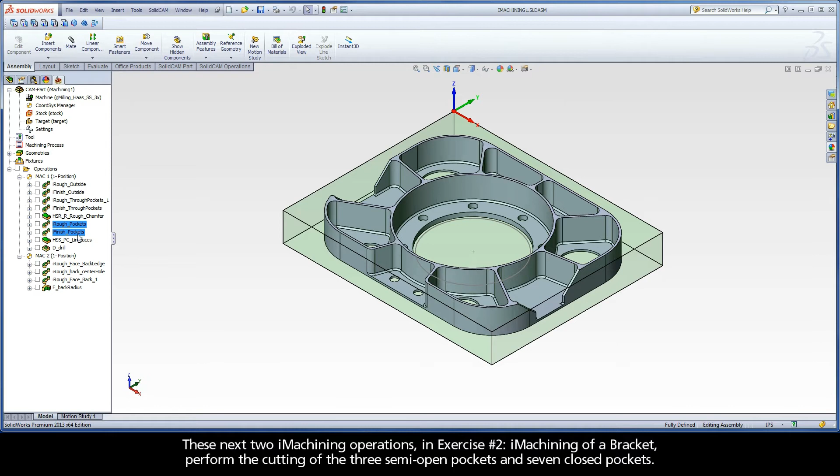These next two iMachining operations in Exercise 2, iMachining of a bracket, perform the cutting of the 3 semi-open pockets and 7 closed pockets. First, let's take a look at the iRough pockets operation. Double-click on the operation in the CAM tree to open the iMachining operation dialog.

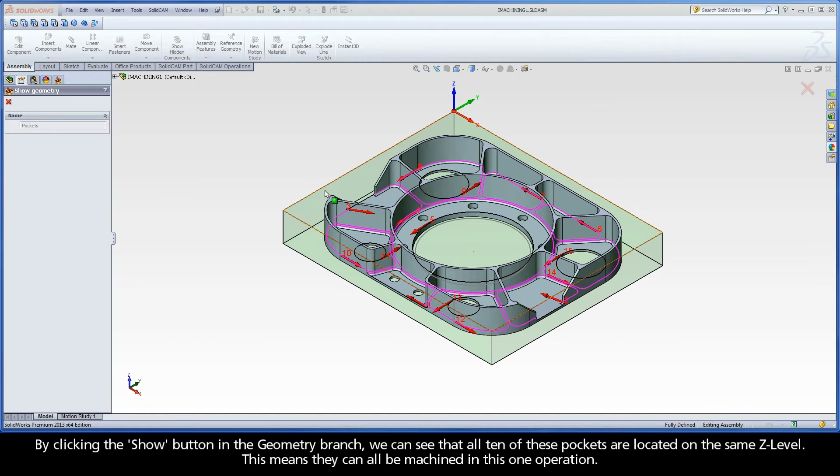By clicking the Show button in the Geometry branch, we can see that all 10 of these pockets are located on the same Z level. This means they can all be machined in this one operation. The first 3 chains have edges marked as open and wall, allowing the tool to enter from those edges. 5 of the closed chains use the through pockets as entry chains.

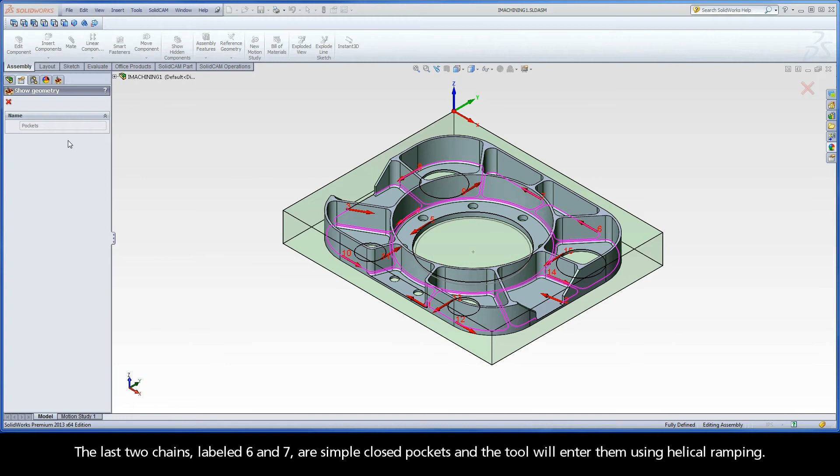The last 2 chains labeled 6 and 7 are simple closed pockets, and the tool will enter them using helical ramping. Exit the Show Geometry dialog by clicking Cancel. We will be using a 3/8 inch diameter bullnose mill with a corner radius of 1/16 inch, as shown on the tool page of the iMachining operation dialog.

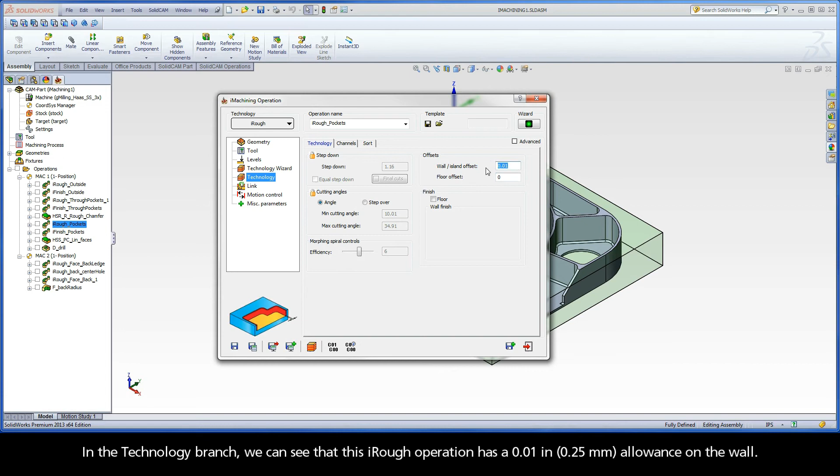The levels have been picked with no additional delta depth. We will use the default Technology Wizard settings with a machining level aggressiveness of 6. In the Technology branch, we can see that this iRough operation has a 10 thou allowance on the wall. Let's click Simulate and take a look at our toolpath at work.

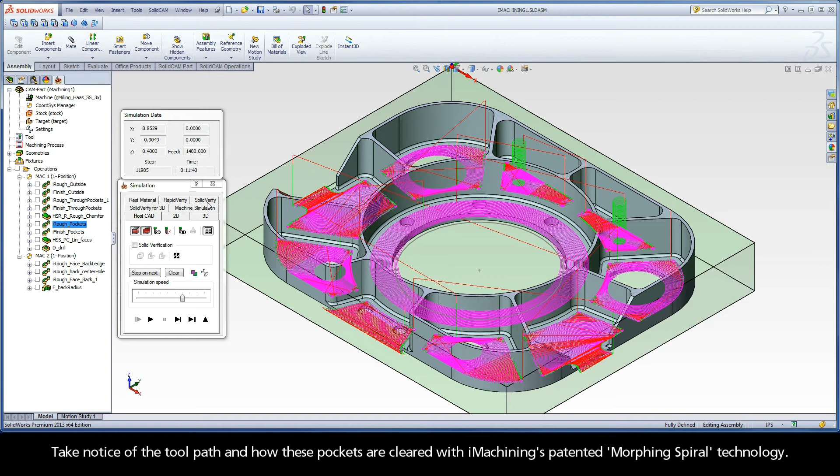In HostCAD, press play. We can see the tool approaches the first 3 pockets from the outside. The tool enters the remaining pockets either by entry holes or helical ramping. Take notice of the toolpath and how these pockets are cleared with iMachining's patented morphing spiral technology.

Now, let's view the simulation using SolidVerify. Press play to view the cutting tool in 3D moving through the solid stock material.

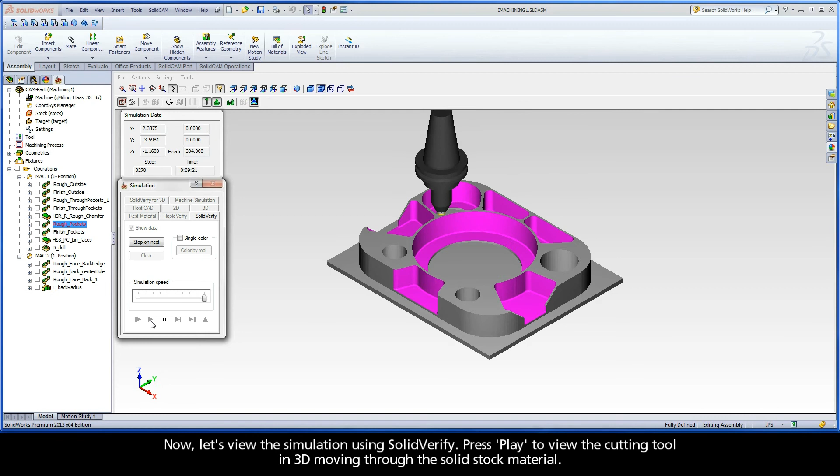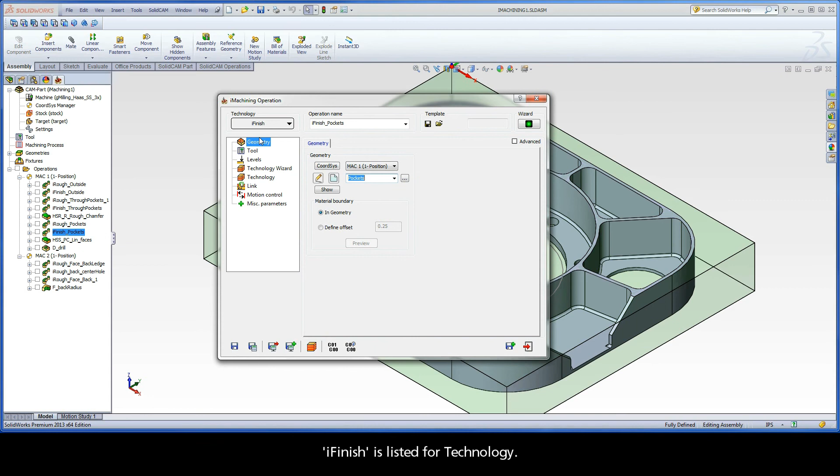Exit the Simulation and Operation dialogs and open the iFinish Pockets operation from the CAM Manager. This operation was made as a copy and will finish the pockets. iFinish is listed for technology. The copy geometry selections, tool, and milling levels are all used from the previous iRough operation.

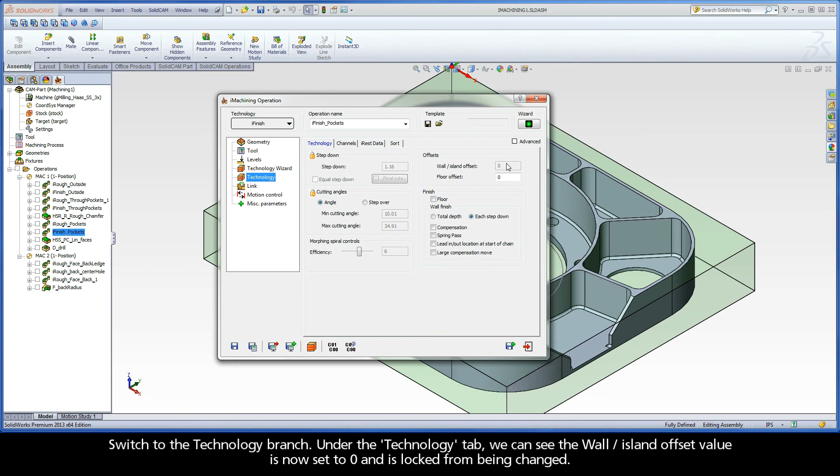We will use the default Technology Wizard settings with a machining level aggressiveness of 6. Switch to the Technology branch. Under the Technology tab, we can see the wall island offset value is now set to 0 and is locked from being changed. Also, under the iRest Data tab, notice that the previous iRough Pockets operation appears in the Parent Operation combo box, and the 3 inherited values are used for calculating rest material.

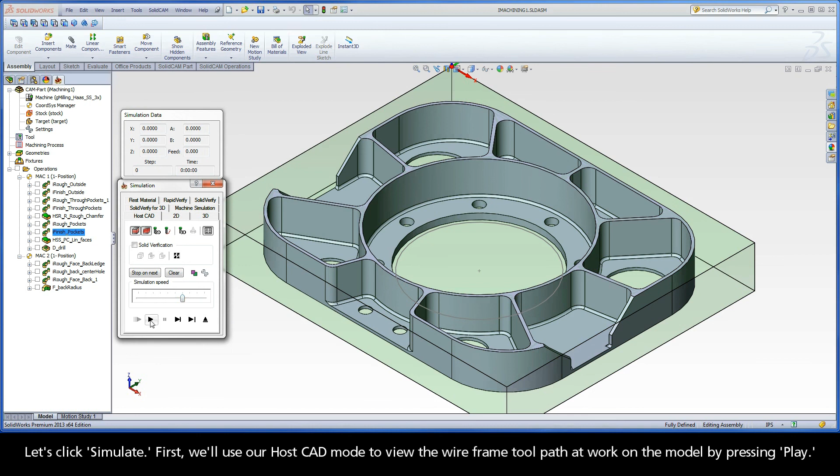Let's click Simulate. First, we'll use our HostCAD mode to view the wireframe toolpath at work on the model by pressing play. Then, we'll look at the machining of our part in SolidVerify. Using the slider, first slow the simulation speed down and then press the play button again. The finishing of each pocket is performed with a single profile pass. Let's exit the Simulation Control Panel and then exit the iMachining Operation dialog.